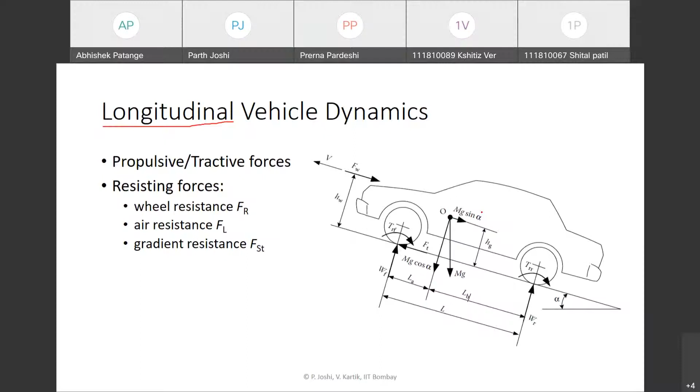So now we will see each of these forces in more detail. First we look at the wheel resistance, also called rolling resistance. It is basically the resistance to the rolling motion of any wheel. This force arises because of the particular material behavior of a tire. Tires are made of rubber, which is viscoelastic kind of material, and because of this particular behavior and deformation of the tire, this force arises.

So normally, if we have a properly inflated tire - sorry for the bad circle, assuming it's a circle - and if it is lying at rest on the road, let us say this is one of the tires and the vehicle has four car tires. Then there will be a certain portion of the tire which is in contact with the road, a small area which will be slightly flattened out, like shown in the picture. Then there will be a certain pressure distribution.

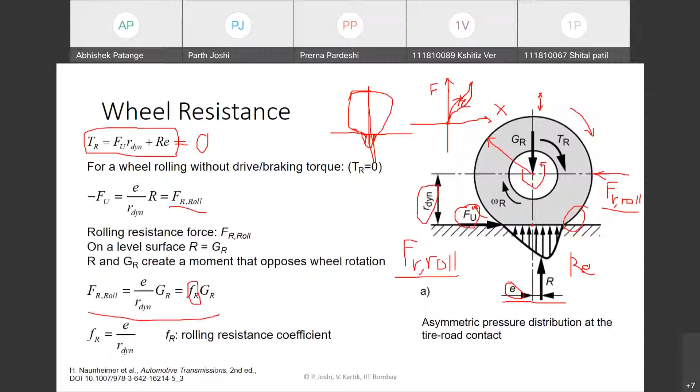From the previous derivation, if we similarly try to derive the rolling resistance force, it comes out to be Fr into mg cos alpha, which is the component of the weight along the direction normal to the inclined plane.

This rolling resistance coefficient is found to be approximately constant for low speeds. Normally we do not encounter very high grades, so generally the road slope is gentle, and the gradient is expressed as a percentage.

It is basically tan alpha expressed as a percentage. If the grade is generally 10% or lesser, then the value of alpha is about 5.7 degrees. Because of this small angle, the value of cos alpha is nearly 1, so for practical purposes we can ignore its effect if it is a gentle grade.

Now, how do we calculate this value of the rolling resistance coefficient? If we have a passenger car on a concrete road, empirically, from research, a good fit has been found that expresses the behavior of the rolling resistance coefficient with vehicle speed. For low vehicle speeds it's somewhat nearly constant, and as the vehicle speed increases, it rapidly increases too.

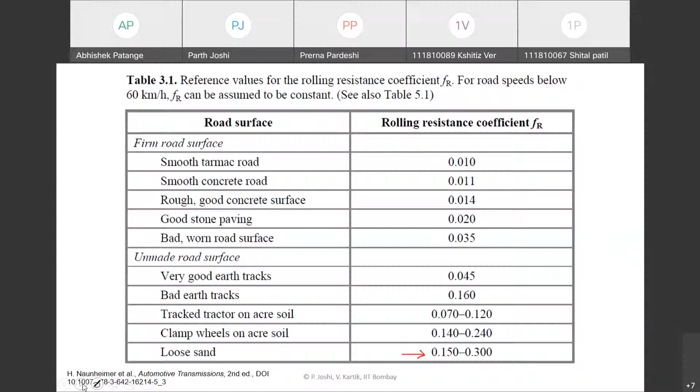So another force is the air resistance. When a body moves through any fluid, let's say if the car is moving through air, then while moving through the air, because of the motion and the particular shape of the vehicle, a certain amount of air is being displaced, so the vehicle pushes some air aside.

So when the vehicle moves forward, whatever air was displaced by it, let's say the air was pushed out when the vehicle was here, then the air was pushed out.

So when the vehicle has moved forward, the air tries to come back into that zone, creating a kind of vacuum or low pressure region on the backside of the vehicle. Meanwhile, the air in front of the vehicle is pushed forward, which compresses the air and creates a high pressure zone in front.

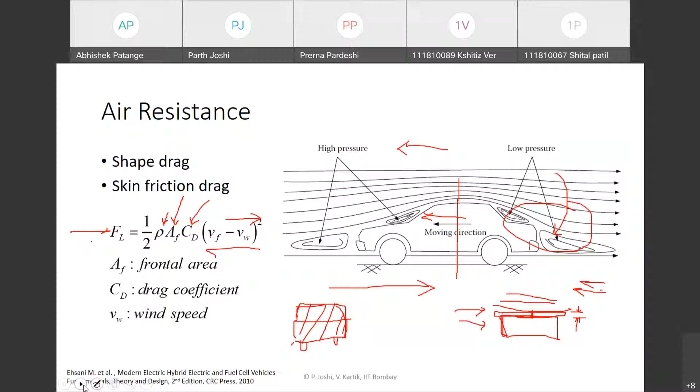If we look at typical values of the drag coefficient for different kinds of vehicles: for a motorcycle with a rider, the drag coefficient generally lies in the range of around 0.5 to 0.7. For a flat plate oriented opposite to the direction of motion, the drag coefficient is nearly 1.

If we have a small, smooth geometry and a small frontal area, you would generally tend to have a lower drag associated with that. So generally companies try to make the shape of the body as aerodynamically efficient as possible.

Let's consider passenger cars like Mercedes or Porsche. They have a relatively lower drag coefficient, about 0.3 or so. Whereas buses generally have a flat plate kind of geometry, so looking at the frontal area, the drag coefficient would be substantially higher, up to about 0.8 or so, because of the box type shape that the bus body has.

So these are the typical drag coefficient values for different categories of vehicles.

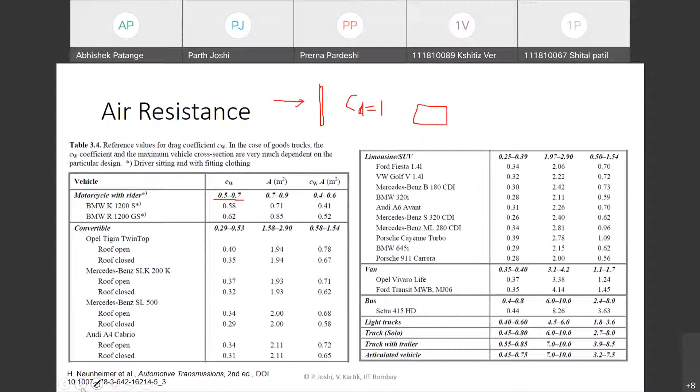So another force that we encounter is the gradient resistance. When the vehicle moves along an inclined road, let us say alpha is the angle of inclination. The weight of the vehicle would always act in a vertically downward direction.

If we resolve the weight in a direction normal and along the inclined plane, the component of the weight along the direction of motion is mg sine alpha. In this case, because it is moving up the road, this component of the weight is actually opposite to the motion, so that also causes some resistance to the motion.

If the vehicle was moving downhill, then this particular component of the weight will actually act in the direction of motion, so this will assist the motion.

So these are some typical gradients that we encounter, these are for Europe. These are the maximum road gradients that we can encounter in some of these countries like Germany or France. There are some cases where there are steep slopes like 26%, but typically even a gradient of 10 to 12% is also considered very high for a vehicle to climb.

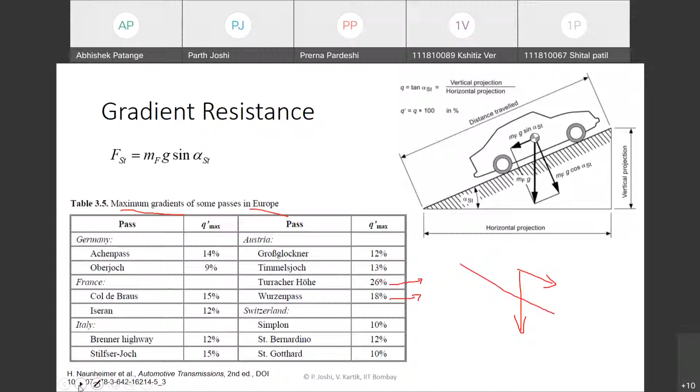So now, till now we have seen what are the resisting forces, which includes the wheel resistance or rolling resistance, the force due to the gradient, and also the air resistance. Now, if we try to write the equation of motion of this particular vehicle, we apply Newton's second law. Here we consider this vehicle as a lumped mass with some mass m.

So the mass into the acceleration will basically be the net force acting on the vehicle, which is the difference between the tractive force acting at the wheels, arising due to the power source, and the resisting forces.

So here we introduce a factor lambda. Since we are considering this vehicle as a lumped mass, we also incorporate the effect of inertia of rotating components. There is a certain amount of inertia and certain amount of work done in rotating these components like the IC engine, transmission, and differential, and there are many rotating components throughout the drive line.

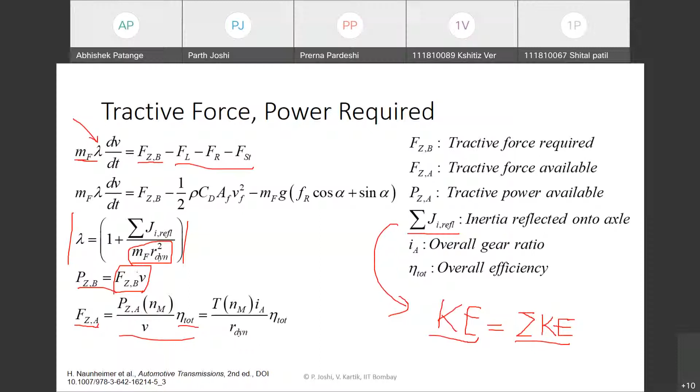In the first gear, the gear wheels required to provide the higher gear ratio need to be substantially bigger, so they have higher inertia associated with them. The inertia scales as mass into r square, so as the size of the gear increases, the inertia will significantly increase. For the lower gears, the inertia effect is much more significant, whereas for the higher gears, let's say fourth gear or even a fifth gear, the inertia may not be that significant.

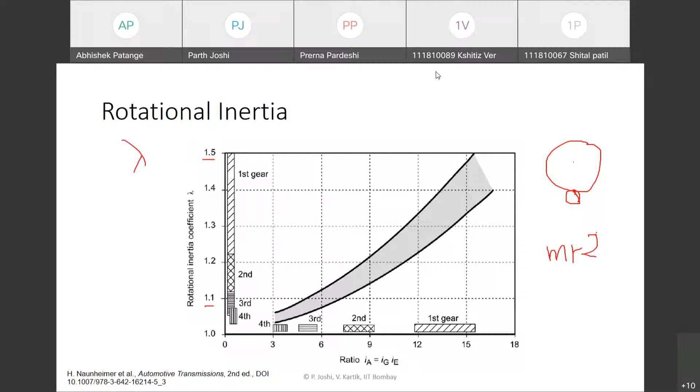So, any doubts on this? Any questions or comments up to this point? At least you can respond, even if you don't have any doubts. Hello. No doubts, sir. No doubts, sir. Yeah, fine. Yeah, thanks.

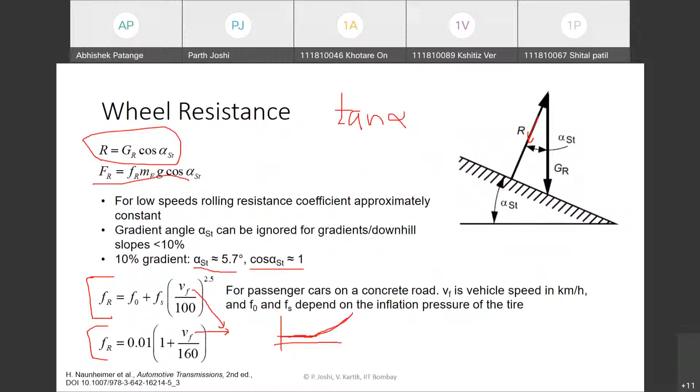The rolling resistance force is largely independent of vehicle speed at lower speeds. As we looked at the rolling resistance coefficient expression, for low speeds it's somewhat constant, and then it increases rapidly with greater vehicle speeds. That would be the nature of the rolling resistance force, Fr.

The air resistance force is directly proportional to V square, the velocity squared, so there is a quadratic, parabolic nature to the rate of increase of air resistance. We can see that these kinds of curves are parabolic in nature.

With increasing gradient resistance, we need significantly higher and higher amounts of tractive force. For different grades, the gradient resistance is independent of vehicle speed; it only depends on the road inclination and the weight of the vehicle. We neglect the reduction in the weight of the vehicle as it moves at constant speed.

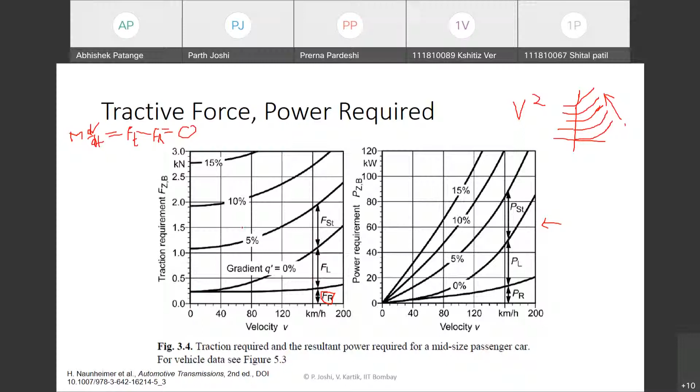So the sum of the resisting forces is what is being provided by the power source over here.

As I mentioned earlier, there is a maximum force that can be transmitted by the tire and road surface, the contact patch between the tire and road surface. It can withstand a certain amount of maximum force, which is governed by the adhesion limit, or basically there are adhesive forces at the contact patch, which are responsible for this particular propulsive force.

So this particular limit of adhesion is given by a tractive force coefficient or static coefficient of friction. Normally we have the static wheel radius, which is the distance from the center of the wheel to the road contact plane when the wheel is at rest. And we have a dynamic wheel radius, as mentioned earlier, the distance between the axis and the tire road contact patch.

So we have a phenomenon called slip, because of the deformation of the tire material. Let us say if this is a rigidly rolling wheel, freely rolling, traveling on a certain flat road, and assume there is no slipping. So the velocity of the center of mass would be r into omega, where omega is the angular velocity of this wheel. So what would be the distance traveled by this wheel in a certain amount of time t? It will be r omega into t.

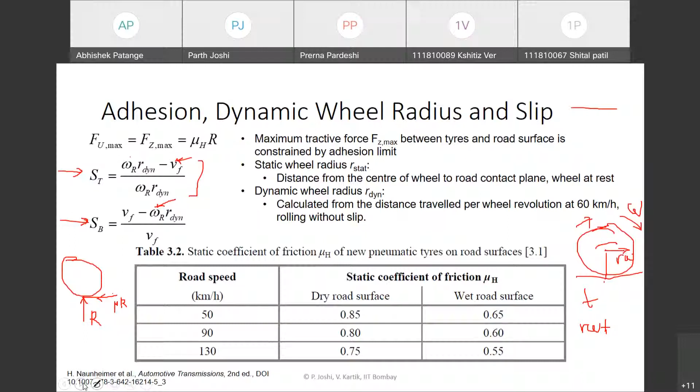So for a dry road surface at a certain speed, let us say 50 kilometers per hour, the static coefficient of friction is about 0.85. Depending on the nature of the road and the speed of the vehicle, this particular coefficient of friction will vary.

So when the tractive force requirement for a certain vehicle speed exceeds whatever can be supplied because of the adhesive capability, then the wheels will start slipping on the ground. This is especially observed during the rainy season when the road becomes wet. Then we can see that the tires actually start slipping, and even on icy roads or snow covered roads, or on sand or soft roads. Those kinds of roads do not have much capability to supply tractive force, so because the road cannot support much traction, the wheel starts slipping.

So similar to the rolling resistance phenomena, the tire tread, because of the particular motion of the wheel, gets compressed in the front, whereas the tire treads behind are being released or unloaded. So this asymmetric pressure distribution also gives corresponding shear force, shear deformation in the side walls of the tire.

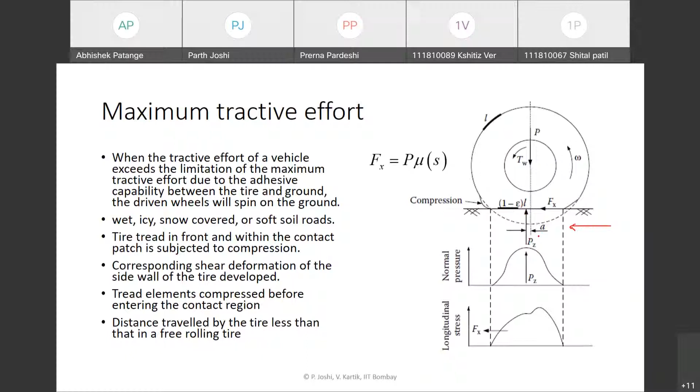This gives rise to this particular force Fx, which is the tractive force. Because of the asymmetric pressure distribution, we get this tractive force from the shear component, and also this eccentrically displaced force component Pz, which is displaced by this distance a from the axis.

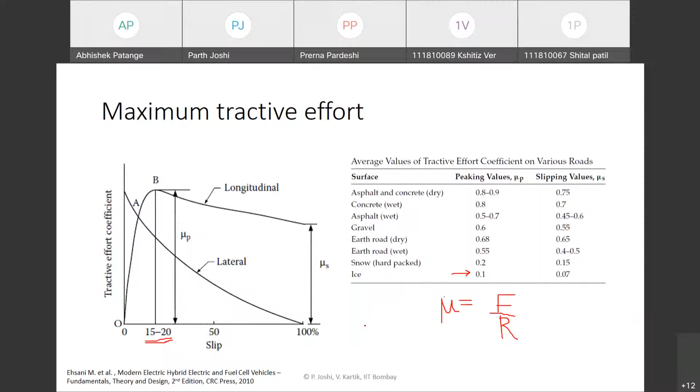So up to this point, are there any questions or doubts?

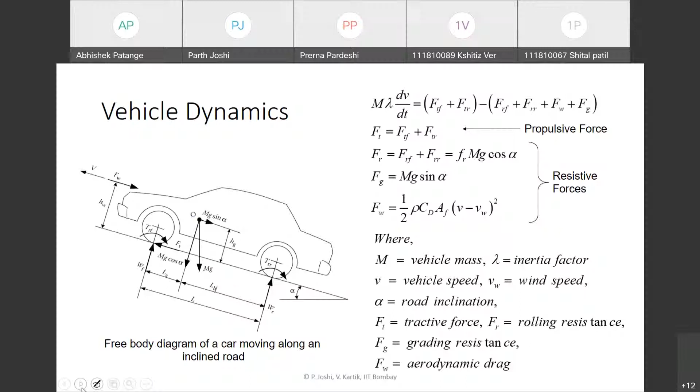If not, I'll give you an activity. Let us derive the expressions for the axle reaction forces. Let's say this vehicle is moving along this inclined plane, and you can consider this notation given in the figure. I hope this figure is clearly visible. We just saw what are the different forces acting on the vehicle, the resisting forces as well as the tractive forces are shown in this figure. We also have the reaction forces: WF is the reaction force on the front wheel, and WR is the reaction force on the rear wheels.

So now the task is to derive the expressions for these axle reaction forces, and then find out what are the expressions for the maximum tractive force for a front wheel drive as well as a rear wheel drive vehicle.

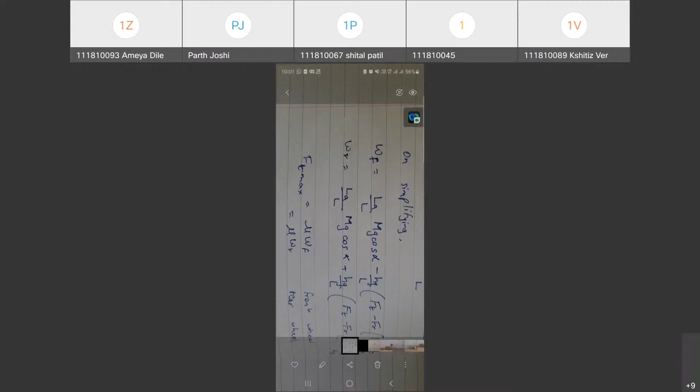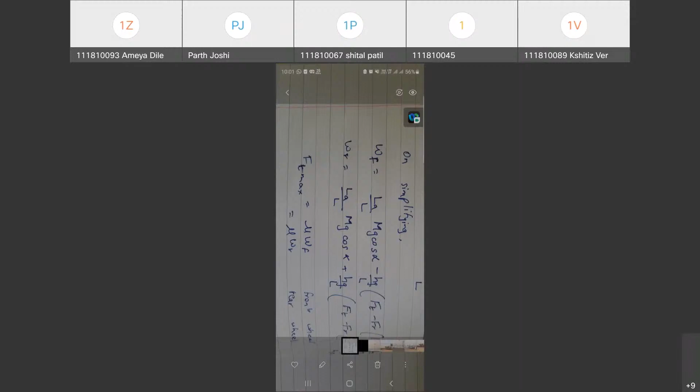Sir, can you see my photo? Hello? Yes, yes, I can see your solution. Can you rotate it if possible? I'm not sure, keep the screen rotation on or something. It's visible but rotated. Okay, just a minute, sir. Sir, now is it okay? Yes. It's rotated in that thing, but if you hold your phone horizontally, will it auto rotate? This is okay. Right. Right.

Correct, correct, right. So how did you derive these expressions? Sir, first I took the sum of all the forces - rolling resistance, grade resistance, aerodynamic, and all these resistances. Then I used the momentum equation, m dv/dt equals the summation of all the forces, the algebraic summation of all the forces. And then I simplified it.

And then for WF and WR, I took the moment - the resultant moment at R, at the point where the tire and the ground meet. I took the moment there, and then on simplifying, I've got this equation. Right, right, right.

Correct, correct. And what about this maximum tractive force? So that is just the product of coefficient of friction and the normal force. Mu will be given, and WF is the above expression. Correct.

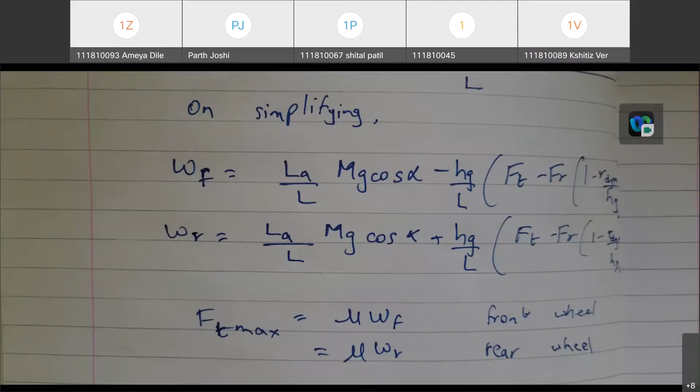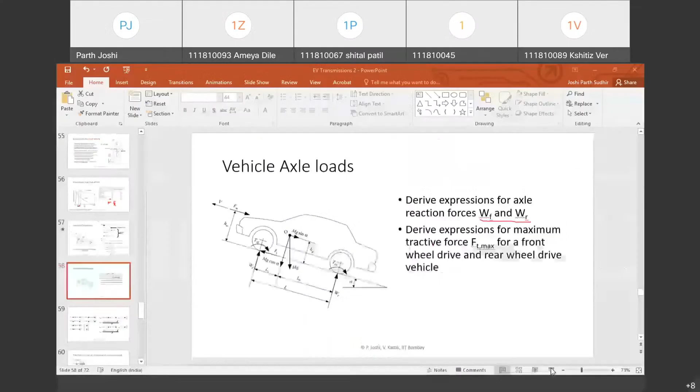So very good, that's the nature of the reaction forces that Ameya has shared. As you rightly said, we need to take moments to derive the axle reaction forces, so we can simplify it to these expressions, which is exactly what you derived.

And for the maximum tractive force, for a front wheel drive, the tractive force will be acting on the front set of wheels, so it will be mu into the front wheel reaction forces. For the rear wheel drive, it will be for the rear reaction forces. So as I mentioned, there will be a tractive force term on the right hand side, so we need to simplify this further to get the maximum tractive force expression for the front and rear wheel drive.

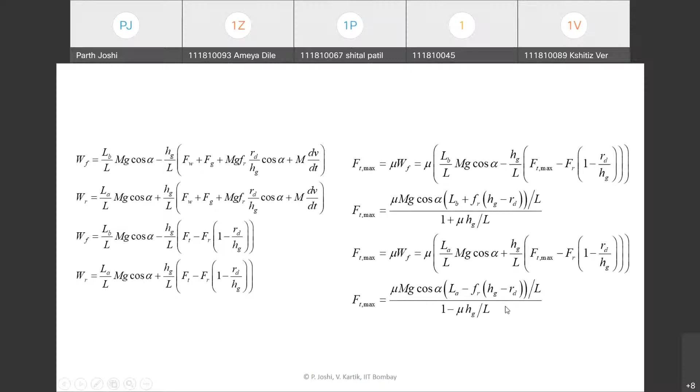So if we now calculate the tractive torque at the wheels and what will be the vehicle speed, we have to express it in terms of the power source - the torque provided by the power source and the vehicle speed as a function of the speed of the power source. So we can derive some simple expressions.

Let IG be the gear ratio of the transmission and I naught be the final drive gear ratio, which is just in front of the differential. So that's the total gear ratio. Eta PT is the powertrain efficiency. If TP is the torque output of the power source, let's say it can be an IC engine or an electric motor or anything.

So we can write this kind of expression for the torque that we will observe at the wheels. And the tractive force will be this torque divided by the dynamic radius of the wheels. So we can derive this kind of expression for the tractive force at the wheels in terms of the torque output of the power source.

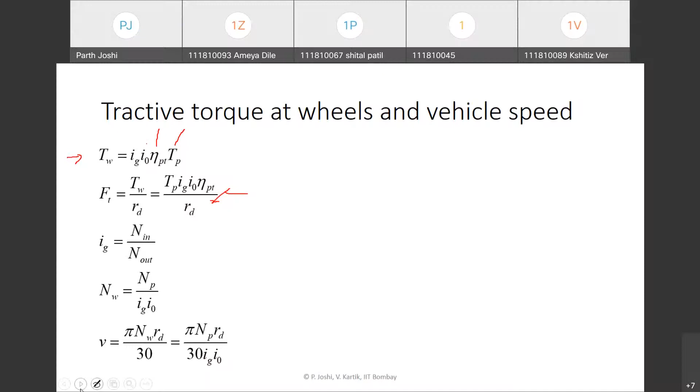Now we'll look at some vehicle performance metrics. So we looked at how we calculate the overall tractive force and what are the different resisting forces. As a result of that, there is a certain maximum speed limit of the vehicle.

Considering the different gear ratios available, and for different speeds, considering what is the maximum power or maximum tractive force that can be supplied with respect to the vehicle speed, we can derive the tractive force requirement. We also know how the maximum tractive torque varies for the power source - let's say for an IC engine, we know the torque and speed curve, the maximum torque-speed curve for the IC engine, and we also know the gear ratios of the transmission.

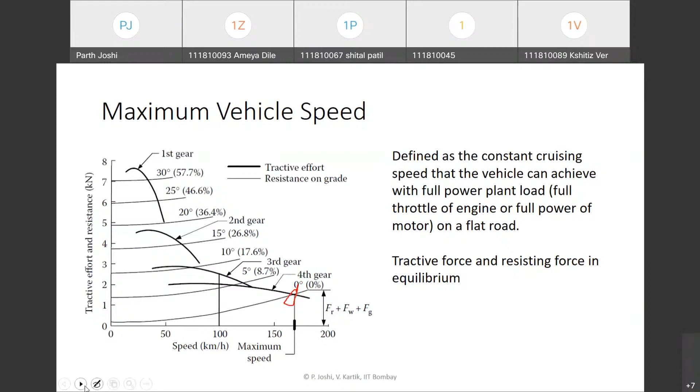So if we have to derive an expression for the maximum vehicle speed, we will equate the tractive force with the sum of the resisting forces. We get the expression for total tractive force in terms of the IC engine torque here, and we know the various resisting forces and the road gradient, so we have a function in terms of v square.

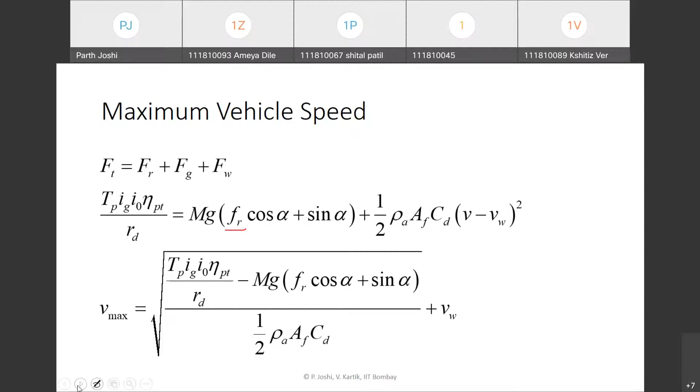This particular term will vary with vehicle speed. Let's assume the rolling resistance coefficient is constant for now. Then we can derive an expression for maximum vehicle speed, which looks something like this. Because of the quadratic nature, we get the expression for maximum vehicle speed as the square root of the net resulting tractive force minus the rolling resistance force and the gradient resistance. So this is about the maximum vehicle speed.

Another important metric... before we move on, for the maximum vehicle speed, we derive the maximum speed as the intersection point between the tractive force required and the tractive force available, those two curves. So what if there is no intersection point between the tractive force required and the tractive force available? How will we define the maximum vehicle speed in that case? Any guesses?

So Kshitiz Verma, do you know what we need to do if we do not find an intersection point between this tractive force required and tractive force available curve? Sir, I think then we'll be using the available tractive force to calculate it.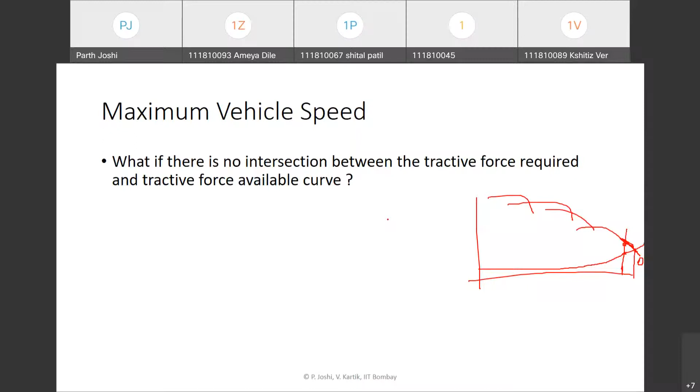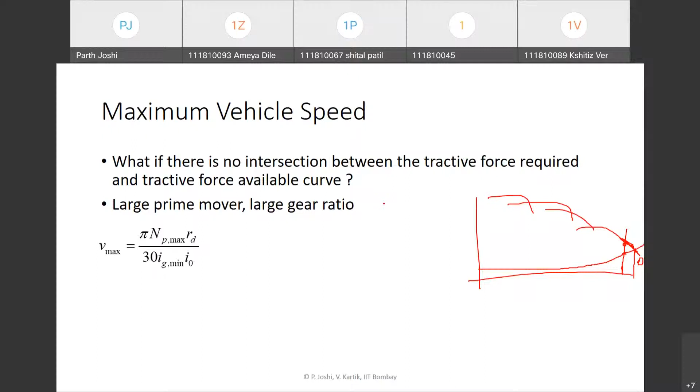So if there is no intersection point, we will just go by what is the maximum vehicle speed achieved at the highest gear, or I'm sorry, the lowest gear ratio, considering the engine is supplying maximum torque at its maximum speed. That will be the maximum speed in that case. Does that make sense? Yes, sir. Okay.

Now another important metric which is called gradability. Is anyone of you already familiar with this term?

Gradability is basically the road grade or grade angle that the vehicle can overcome while moving at constant speed. It's an important vehicle specification, especially for heavy commercial vehicles or off-road vehicles. It is defined as the maximum grade that it can overcome over its whole entire speed range, which is an important performance specification for these category of vehicles.

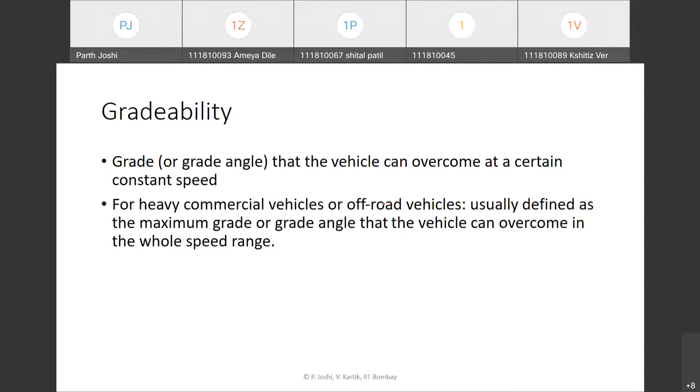So how do we derive the expression for gradability? Since the vehicle is moving at constant speed, there is no acceleration. If we go back to the equation of motion and equate the acceleration to zero, we get that the tractive force is in equilibrium with the resisting forces. On the left hand side, we get the tractive force in terms of the power source torque output, and on the right hand side, we have the resisting forces.

So what do we have to derive over here? We have to calculate alpha. For a given vehicle speed at full throttle, what will be the maximum grade that the vehicle can climb? We know the vehicle speed, we know the output torque of the power source, and we also know the gear ratios. So we know the maximum torque versus speed characteristic, or the tractive force or tractive torque available versus vehicle speed. And for the given vehicle speed, what is the maximum grade that it can climb?

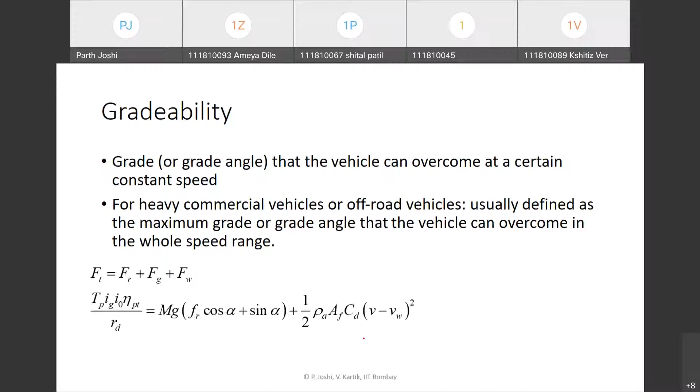So to derive that, we have to basically derive an expression for alpha. How will we derive that? Here we just need to do some trigonometric manipulations. Let us say we substitute tan beta equal to Fr, where Fr is basically the rolling resistance coefficient. Then we get cos beta - so what will be the value of cos beta if tan beta is Fr?

It will be 1 upon square root of 1 plus Fr square. And sin beta will be Fr upon this whole square root of 1 plus Fr square.

So then we will get this expression. If we divide and multiply by root of 1 plus Fr square, it will be sin alpha into cos beta plus cos alpha into sin beta, which is the same as sin of alpha plus beta.

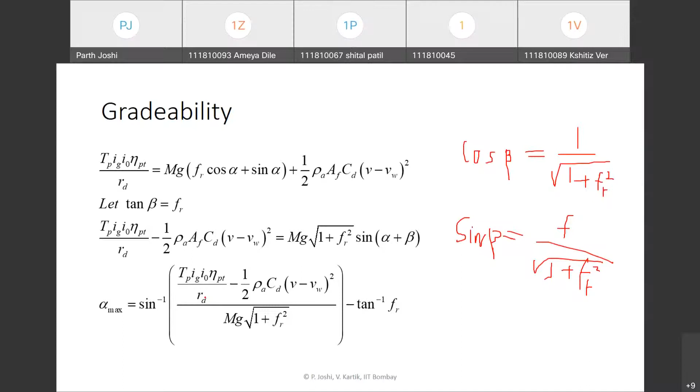Another performance metric is basically the acceleration performance. It is reported as the time that is required to accelerate between a certain given set of speeds, let us say from 0 to 100 kilometers per hour at full throttle. This is commonly called WOT, wide open throttle. So if we accelerate at full throttle, what is the time required to go from 0 to 100 kilometers per hour, or let us say 30 to 50 kilometers per hour? That is how it is generally reported in industry for different vehicles. It's an important performance specification.

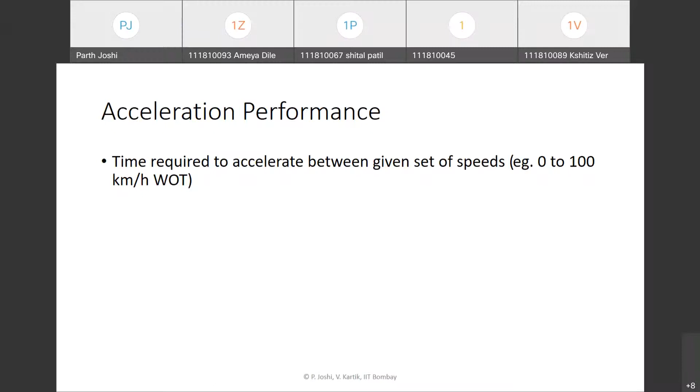So how do we calculate this acceleration performance? Again, we come back to our equation of motion, where we express this acceleration in terms of the tractive force and resisting forces. Now what we have to derive is basically the time. If we further simplify this expression in terms of the tractive force and resisting forces, we get that same kind of expression.

But now what we have to do is figure out how we will derive the time required. Any guesses? Any answers on that? What do we have to do to derive the time required?

So Vinayak, can you answer that? What do we have to do to get the time required to accelerate? Sorry for the disturbance, if at all. Sorry for the background noise.

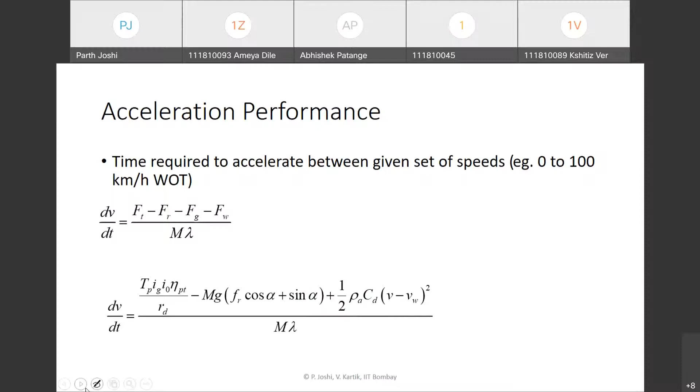Now we can just simply integrate this expression. So for the time required to go from a certain vehicle speed v1 to v2, we can write it as this expression. Similarly, we can also calculate the distance. For a certain time dt, the distance traveled will be v into dt. Since from dv by dt we know the expression for that, we multiply by velocity to get this expression. So this is how we can calculate the acceleration performance in terms of either the distance traveled or the time taken to accelerate between a certain set of speeds.

This acceleration calculation may not always be easy to perform because the torque versus speed availability is different for different gears. So as the vehicle accelerates to higher and higher speed, we also need to know at what speed the vehicle will shift gears, and so we need to perform a complicated numerical integration to evaluate this.